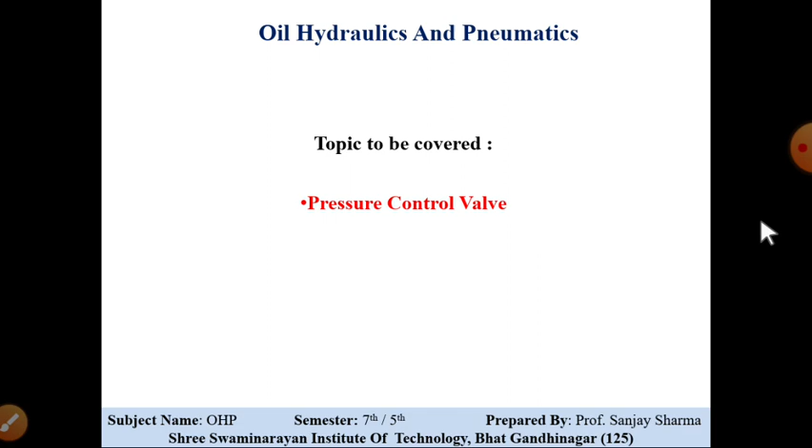Pressure control valves are those valves which are used to protect the components from excessive pressure. For example, if a circuit is working and suddenly there is a rise in excess pressure due to reduction in the required load, it is very important to reduce that pressure. If it is not reduced, there are chances of leakage and failure of the hydraulic system.

So one of the main functions of the pressure control valve is to protect the component from excessive pressure. Pressure control valve is very essential because, if there is no pressure control valve, we cannot adjust our required force as well as the required pressure for the actuator. So this is one of the reasons why pressure control valve is required.

And second, for safety purpose also a pressure control valve is required. Wherever the system is dealing with pressure, a pressure control valve is required. For example, at home in the kitchen, our mom uses a pressure cooker to cook food. There is a deadweight type pressure valve and also a fusible plug type on the top cover of the pressure cooker. These are very important components in order to have a safe operation.

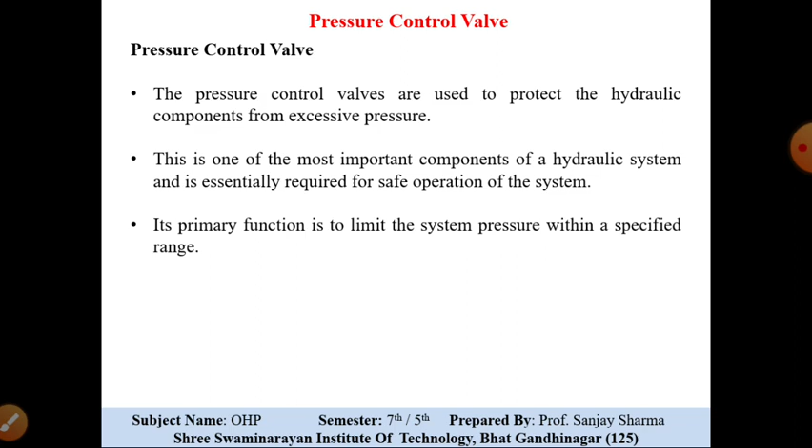Suppose we require some particular 1 bar, 2 bar, 3 bar pressure. That required pressure of the system is set by the pressure regulator valve, so it also works as setting the limit of the pressure. It reduces the system pressure, and as the pressure reduces to the set limit, the valve closes. This is the working of the pressure control valve.

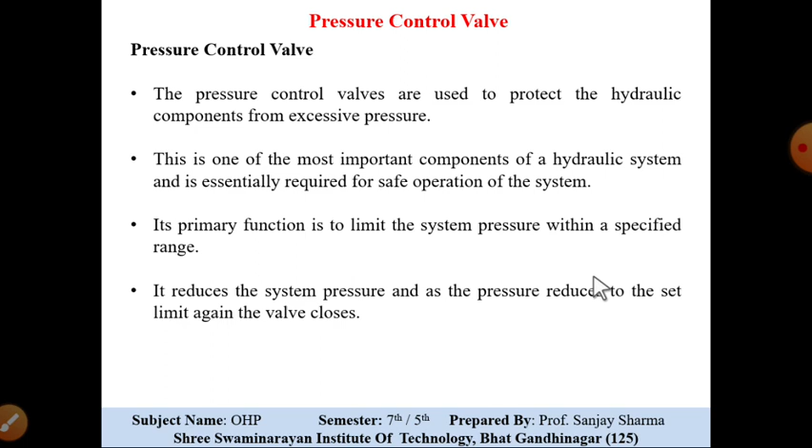For example, if we have set the pressure at 2 bar, the system is working at 2 bar, and suddenly the pressure increases because the load of the actuator reduces, and the pressure rises to more than 2.1, 2.2 or 2.3 bar. If it moves higher, immediately the pressure control valve comes into action and bypasses the fluid, and closes the valve to operate the actuator, which protects our entire system. So it is one of the very important and safe devices used in our hydraulic system.

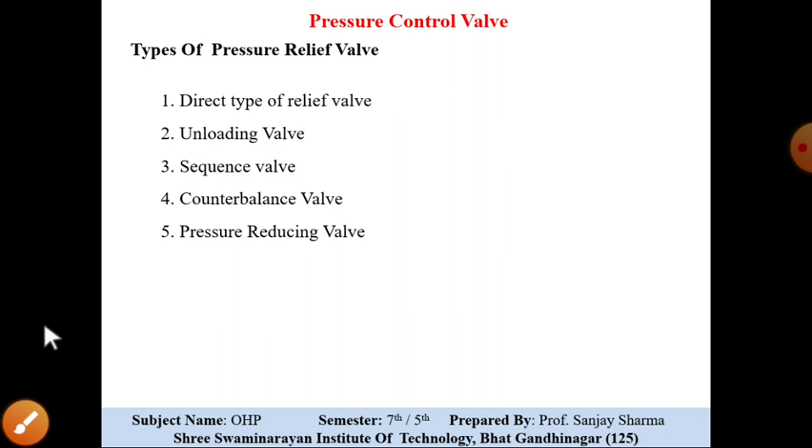Now, what are the types of pressure relief valve? The first is the direct type of relief valve. Second, unloading valve. Third, sequence valve. Fourth, counterbalance valve. Fifth, pressure reducing valve. So these are the 5 different types of pressure control valve or pressure relief valve, also termed as PRV or PCV.

The meaning is the same, so sometimes as a short form they use PCV or PRV. Both are the same thing, so you need not be confused.

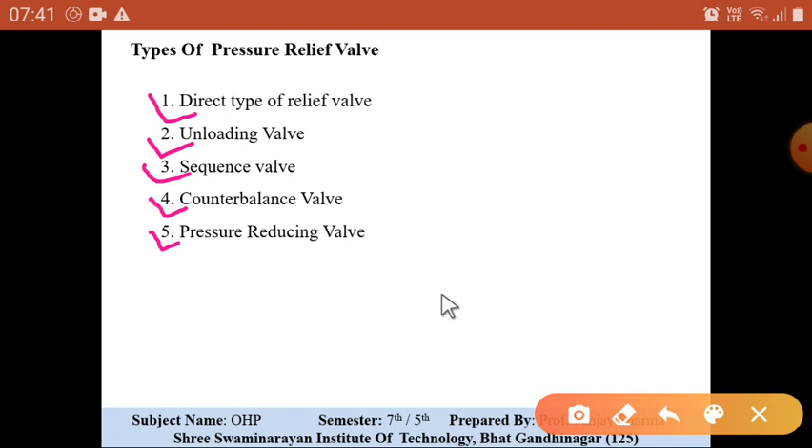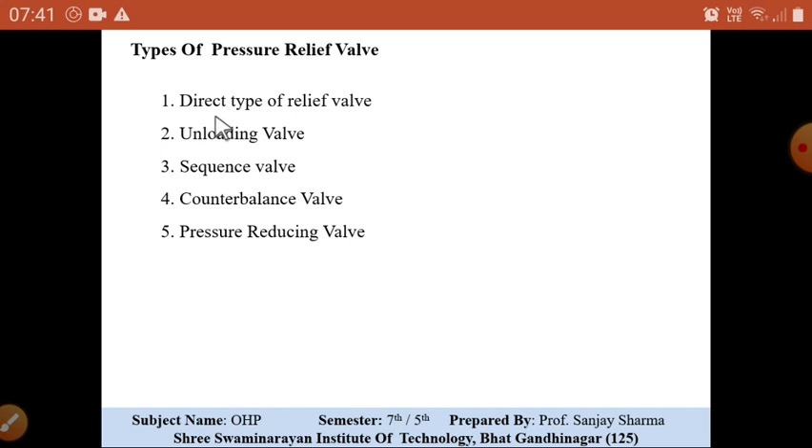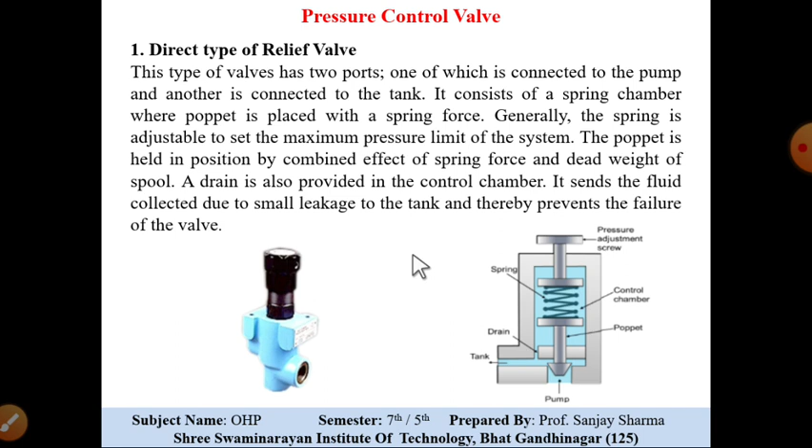Now, unloading valve. What is this unloading valve?

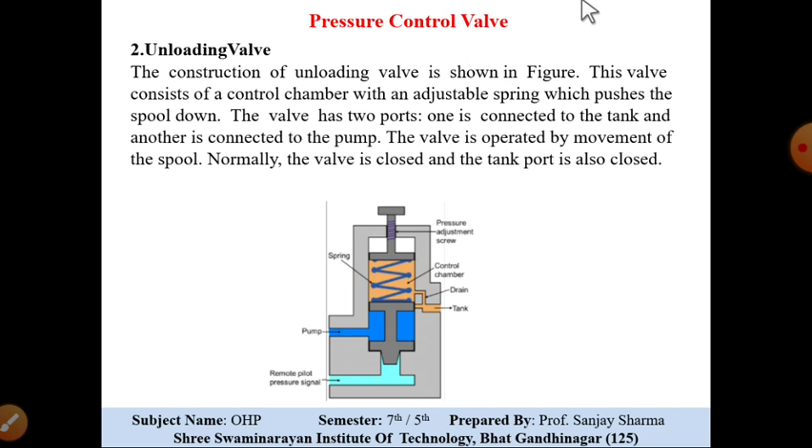Before we move to the entire description of this, let us see the construction and components of this valve. First of all, this valve is connected with the pump here.

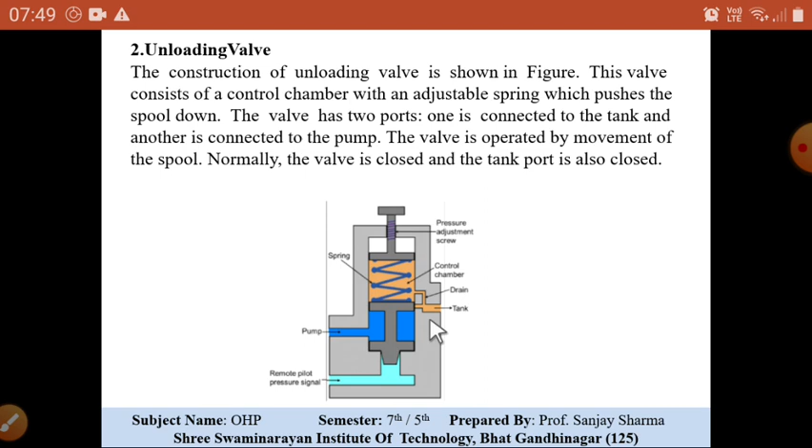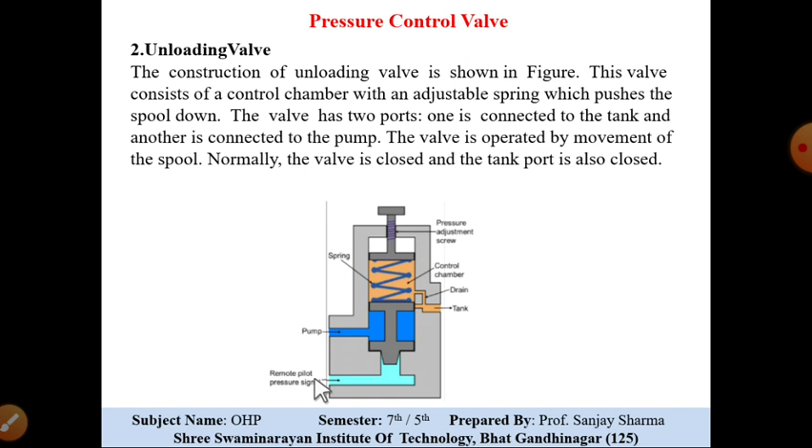I'll show you this. A minimum pressure will keep holding this spool open or close, and the pressure effect is not required from the pump side, but it will easily be controlled from the pilot or the remote pilot pressure signal valve.

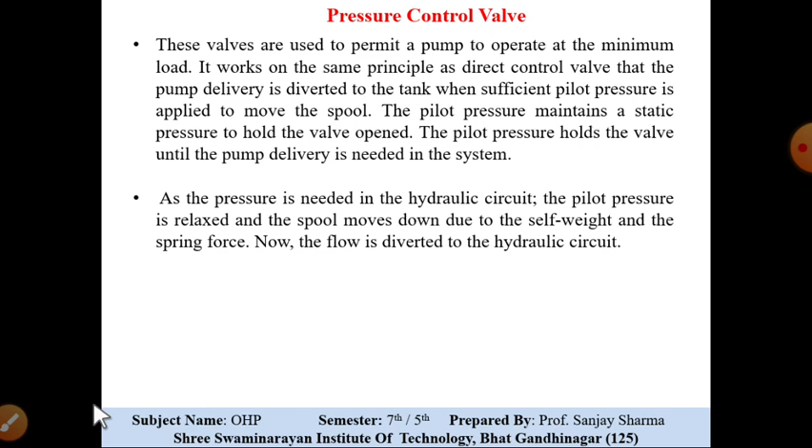See, the pilot pressure maintains a static pressure to hold the valve open, and the pilot pressure holds the valve until the pump delivery is needed in the system. This is a very important function of the pilot valve.

What happens? Until the pump is delivering or whatever is needed of the system, the pressure is controlled by this pilot valve. So here the pilot valve is more responsible for the open and closing of the valve.

Where the pump is working continuously, the opening and closing of the pressure relief valve is controlled by the pilot pressure control valve.

As the pressure is needed in the hydraulic circuit, the pilot pressure is relaxed. This means when the desired pressure is achieved, the pilot pressure also releases, and as it releases, the pump or the spool will come down and stop the bypass flow. As the bypass flow is stopped because of its spring and self weight, the flow is again diverted to the hydraulic circuit, so the system comes back into operation.

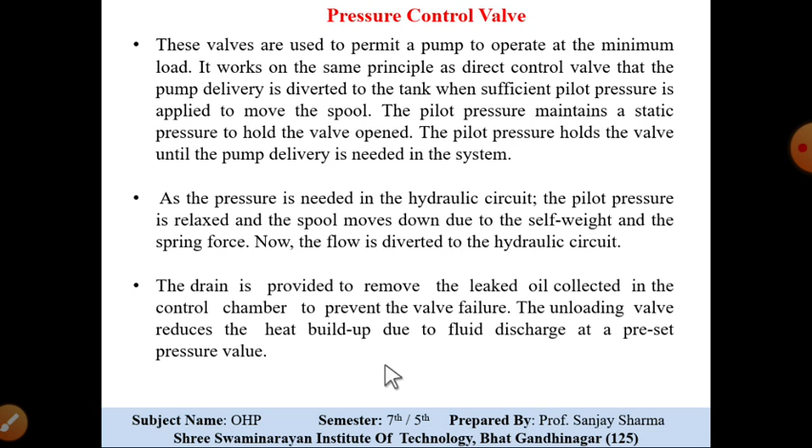Now let us see the next one, that is the sequence valve. What is the function of the sequence valve and how does it control - mainly the function of all the pressure control valves is to control pressure, but depending on the type, how they are actuated and by which parameter they control, based on that they are given different names.

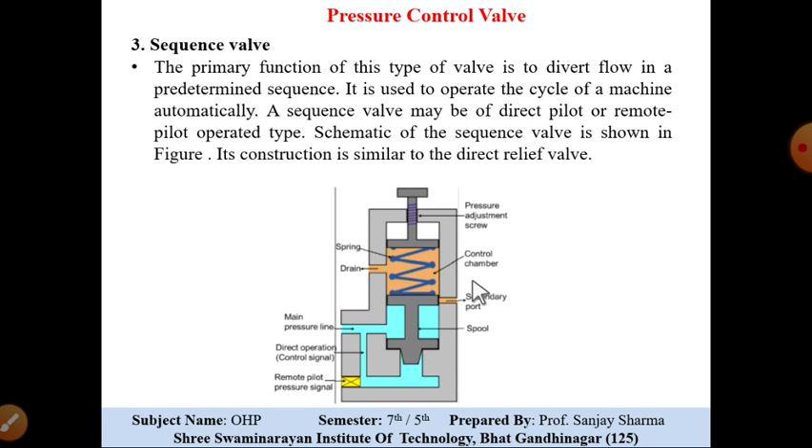Now, as I have already discussed these points, it consists of two ports, one main port connecting the main pressure line and the other port that is a secondary port, that is the second cylinder's port which is connected.

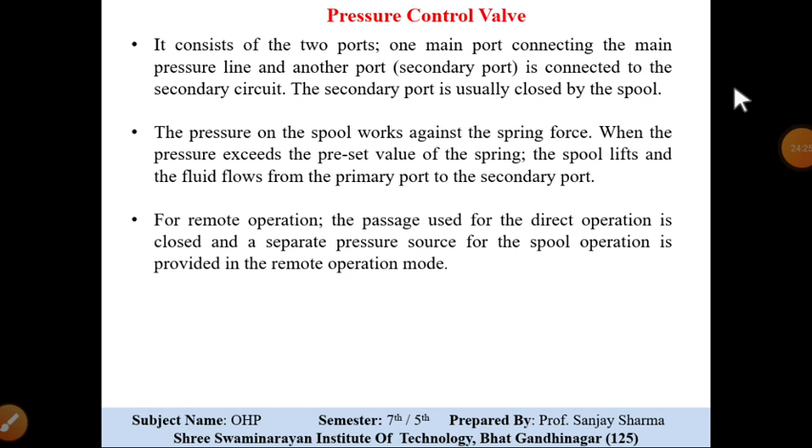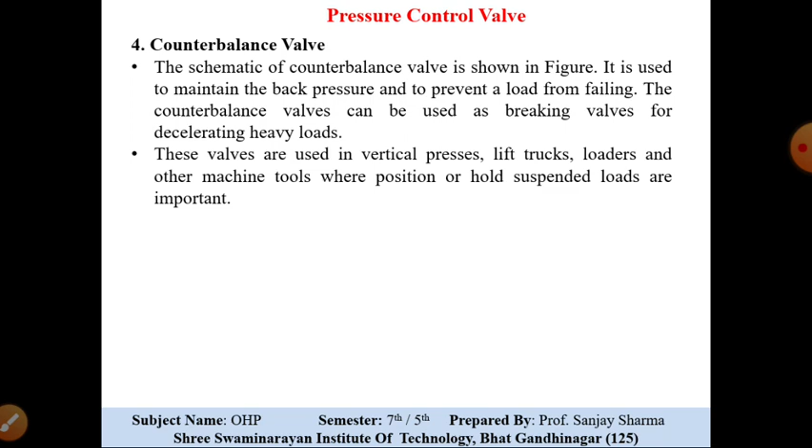Now, the counterbalance valve.

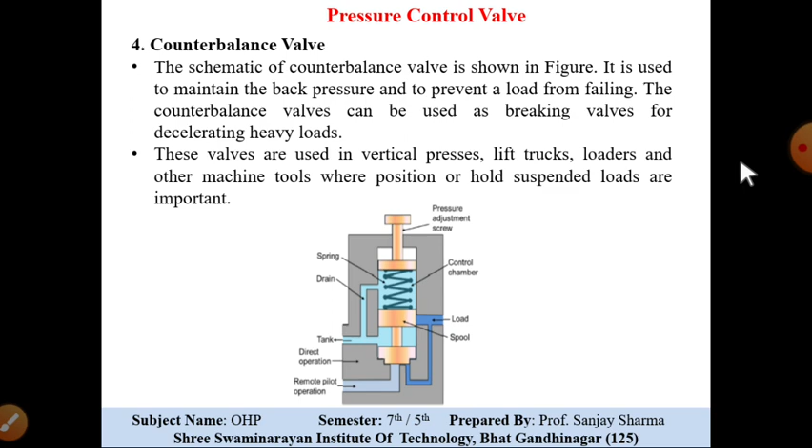The same thing which I have described is being mentioned. This valve is normally closed until it is acted upon by a remote pilot pressure source. Therefore, a lower spring force is sufficient and it leads to the valve operation at the lower pilot pressure, and hence the power consumption reduces, pump life increases and the fluid temperature decreases.

Friends, the use of remote pilot pressure valve is that with a very small change of pressure, the pressure control valve immediately opens. That is only the advantage of using remote pilot pressure valve. And it also increases the accuracy of working of the pressure regulator valve.

Again, with normal change in the pressure, the valve is operating or coming into action. So the main advantage is that the pressure or temperature generated will be very less, and life of the pump and system will increase.

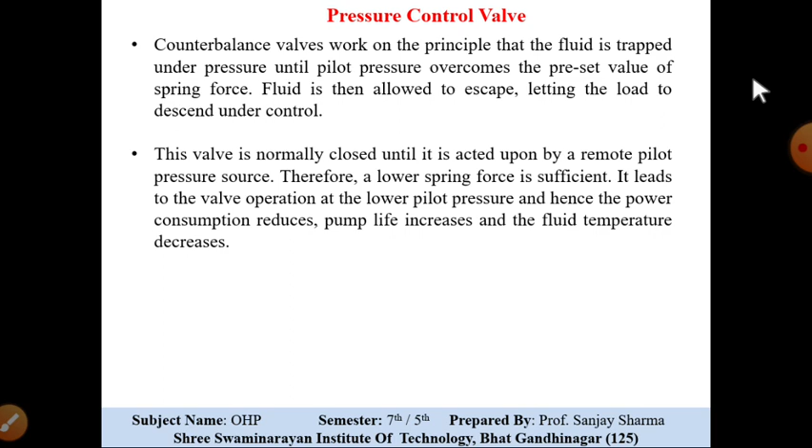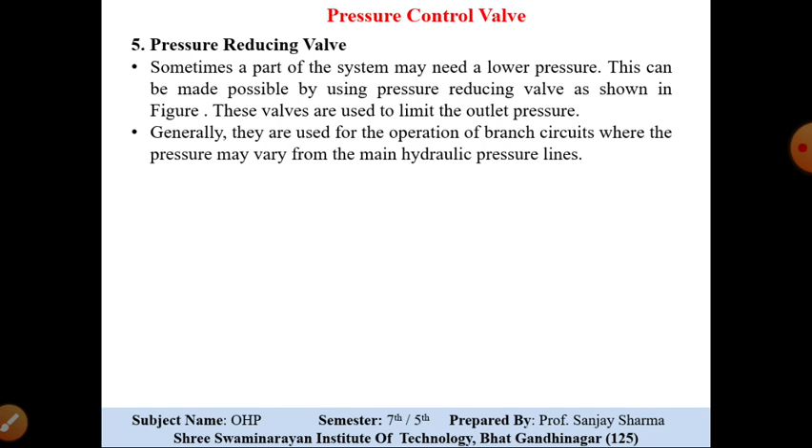The next one is pressure reducing valve. How can we reduce pressure? Sometimes a part of the system may need a low pressure. Now here if you see the construction wise, there is a direct connection, direct flow to the valve.

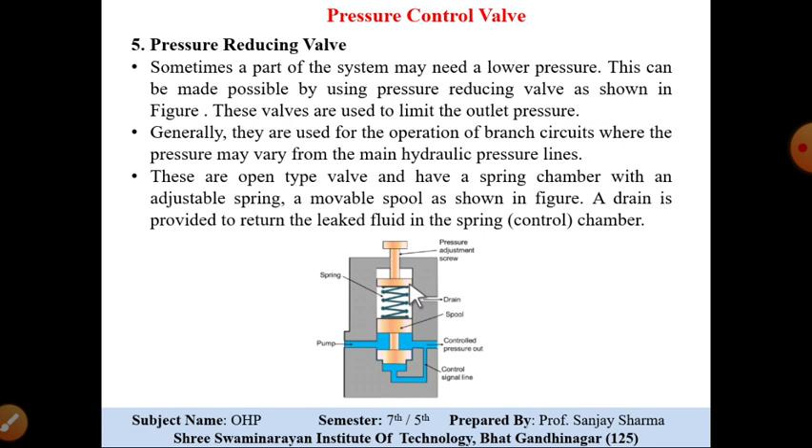And this will force the plunger to move in upward direction. It will compress the spring, and as it moves up, it will stop the flow. Here there is no bypass line. It will stop the flow from the pump, the flow stops here from the pump. So this is how the pressure reducing valve is working.

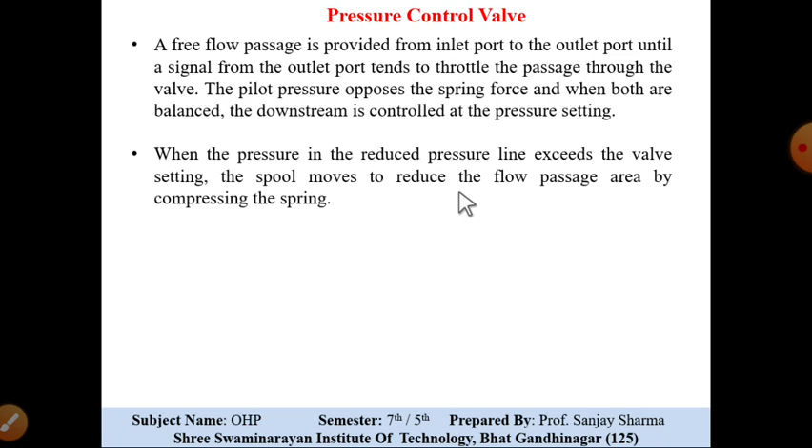A free flow passage is provided as you have seen in the diagram. Now when the pressure in the reduced pressure line exceeds the valve setting, the spool moves to reduce the flow passage area by compressing the spring, and when the spring is being compressed, it will stop the flow. Here it will not go for the bypass, but it will stop the flow.